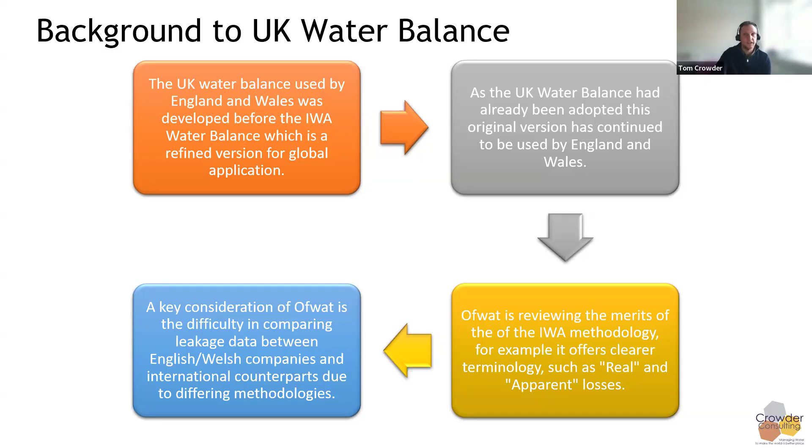So from a UK perspective, or a UK water company perspective, they might be thinking about this at the moment, and what they would be thinking about is, well, what does the IWA water balance look like?

Because they're used to doing their current UK water balance. And how does it compare with the UK water balance? And what would it mean if we had to do our reporting based on the IWA water balance? And should we be paying more attention to international comparisons of performance indicators?

At the same time, the English water companies have quite stringent or difficult targets to meet over the next 5 years. This particular water company that we're going to focus on has to reduce leakage by 16% and per capita consumption by 7%. So there's quite a lot of challenges or thoughts that the English water companies are facing.

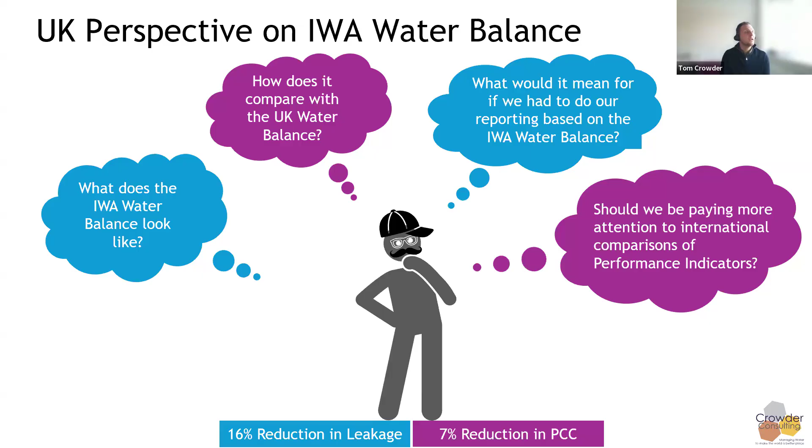Firstly, just a very quick overview of the IWA water balance, and we'll explore this a lot more during today's session. It's a structured framework to account for all water entering and leaving a distribution system, and it classifies water use and losses into standard components to support consistent global reporting. The IWA water balance focuses on breaking down non-revenue water into its key components, and we'll explore those today.

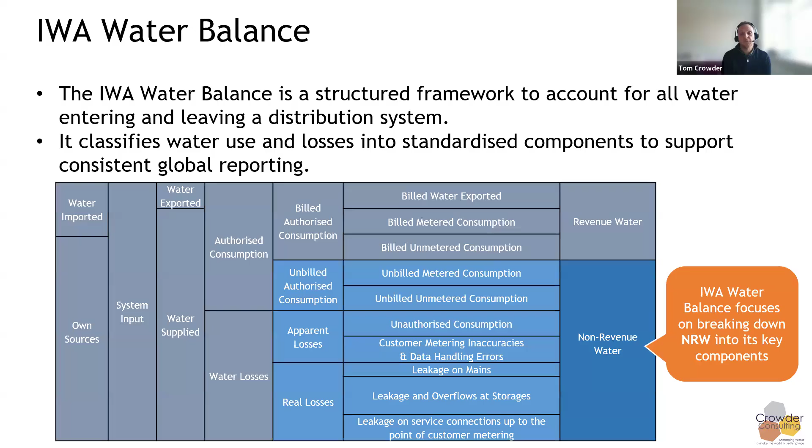Mapping the UK to the IWA water balance is fairly straightforward, because most of the components in the IWA water balance are very similar to the UK, but they just use different terminology, and so they can be mapped. That's part of what I'll show today - how they map to the IWA water balance.

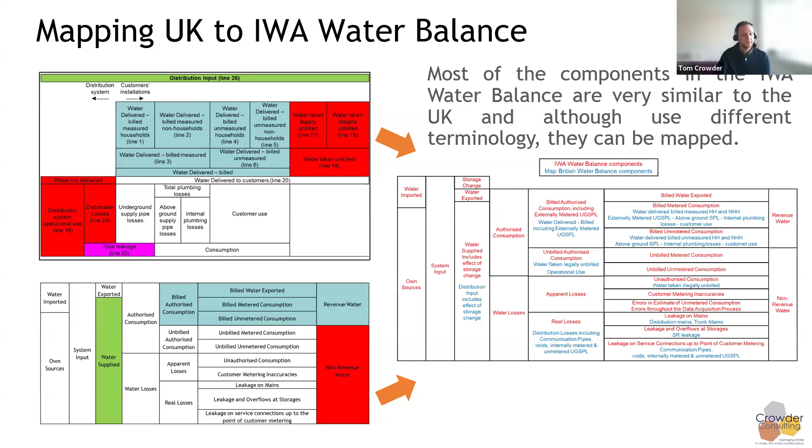So firstly, just some definitions. When we think about non-revenue water, this refers to the water that has been produced by a water utility, but it's not billed to customers. It represents the gap between the amount of water put into the distribution system and the amount billed for consumption. And it includes three main components: real losses or physical losses, apparent losses or commercial losses, and unbilled authorized consumption.

Non-revenue water is often expressed by international utilities as a percentage of water supplied, or it can be expressed as a percentage of system input if they want to make the percentage lower.

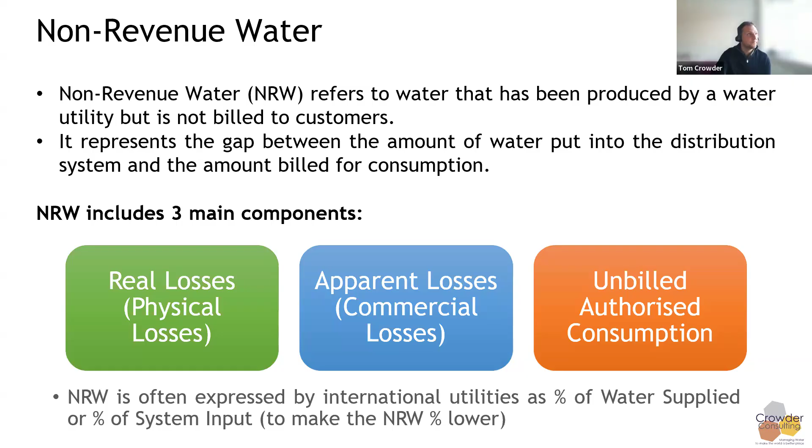Real or physical losses occur due to leaks in a distribution system, including pipes, storage tanks, and other infrastructure, and this water physically escapes the network before it reaches customers. The first really interesting fact is that if the UK or England and Wales water companies did report on real losses, its leakage would be slightly lower, because at the moment the UK includes externally metered underground supply pipe leakage - in other words, leakage that is beyond the water meter on supply pipes - in its total leakage that it reports, whereas the IWA real losses doesn't include that.

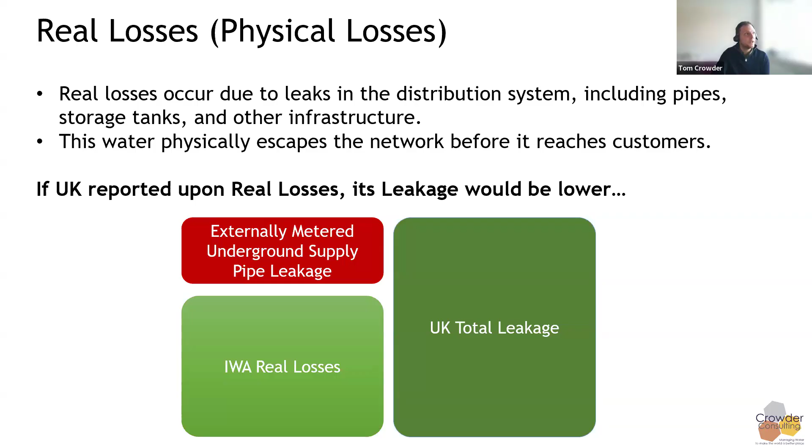Apparent losses or commercial losses occur when water is used but not properly measured, so things like meter under registration, and common causes include theft and unauthorized connections. There's a lot of emphasis internationally on replacing meters to reduce apparent losses as part of their non-revenue water programs. In the UK, these components are deducted to derive reported leakage, whereas in the IWA water balance, they are included under the non-revenue water.

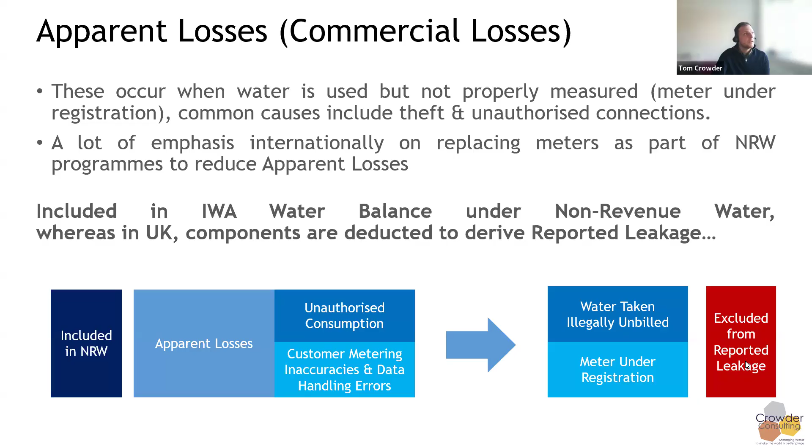Then for unbilled authorized consumption, this is water used for legitimate purposes that are not billed, such as firefighting, mains flushing, or water supplied free of charge. This would be mapped to water taken legally unbilled and operational use in the UK water balance. Similar to apparent losses, these are included in the non-revenue water, whereas in the UK, water taken legally unbilled and distribution system operational use are excluded from leakage.

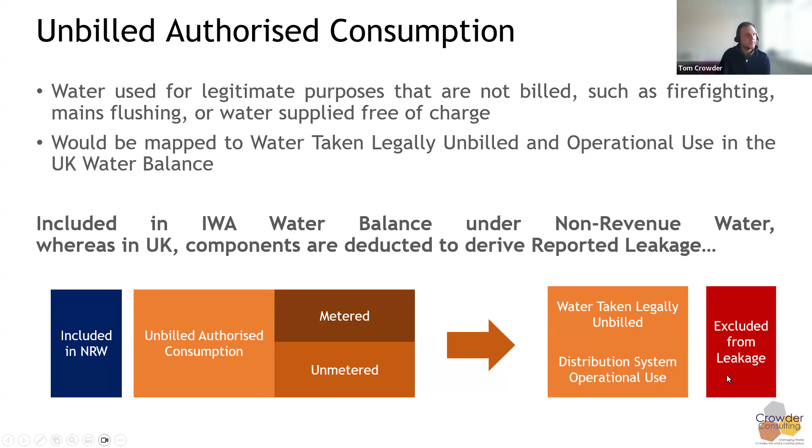So when we look at the top-down water balance for this particular UK water company, this is what it looks like. It starts with what we call distribution input, and then we deduct all of the billed consumption, we deduct the operational use, we deduct the water taken legally unbilled and illegally unbilled, and we deduct the meter under registration, and then we end up with the top-down leakage, which is what we use in the UK water balance.

And we compare this with the bottom-up leakage, which I'll go into later, and reconcile that with it. In this particular case, the bottom-up leakage was just over 335 megalitres. So there's a very small negative discrepancy, and the reported leakage was 335 megalitres after reconciling it with the bottom-up.

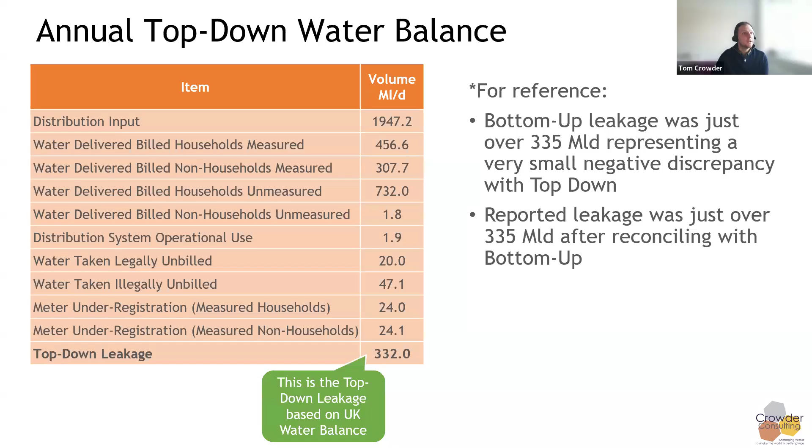If we applied the same rules for leakage or real losses as the IWA water balance, then we wouldn't add on the externally metered underground supply pipe losses. This is really just illustrating that the real losses would be slightly lower because we wouldn't be adding on this amount to the leakage. So it's just showing that discrepancy between real losses and the leakage that we report in the UK.

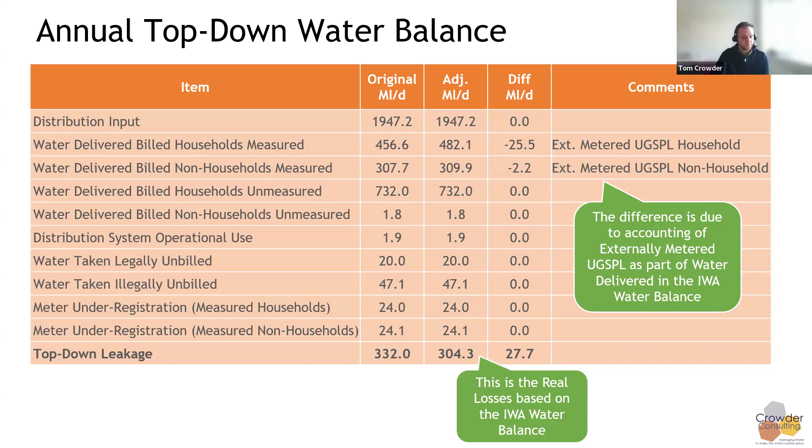The first thing to focus on is the non-revenue water calculation. Here in the UK, we don't focus that much on non-revenue water as a number that we report, but internationally it's a very important part of the water balance. If this water company were to move to the IWA approach and report based on non-revenue water, the figure would be over 86 megalitres higher, or 26% higher, than the number they're currently reporting, which is the leakage.

These tables show how non-revenue water would be calculated for this English water company. On the left we've got the English or UK terminology, and on the right the IWA terminology. We can see this calculation of non-revenue water, which is the water supplied take away the billed authorized consumption, giving us our non-revenue water. In this particular case, it would be around 22% of the water supplied.

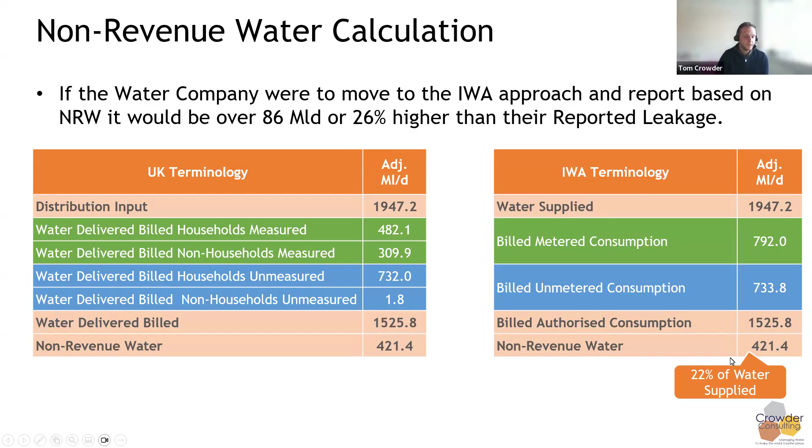Then if we calculate the real and apparent losses, if this water company were to move to the IWA approach and report based on real losses, it would be 27.7 megalitres lower, or 8.3% lower, than the leakage they're currently reporting.

Again, what we've got here is the UK terminology in terms of the water balance and what they call each component, and then the international IWA terminology. We can see how we start with non-revenue water, take away unbilled authorized consumption to get water losses, then take away unauthorized consumption and customer metering inaccuracies, which is our apparent losses, leaving us with the real losses. So it's showing how the two water balances, although they use different terminology, do line up quite well with each other.

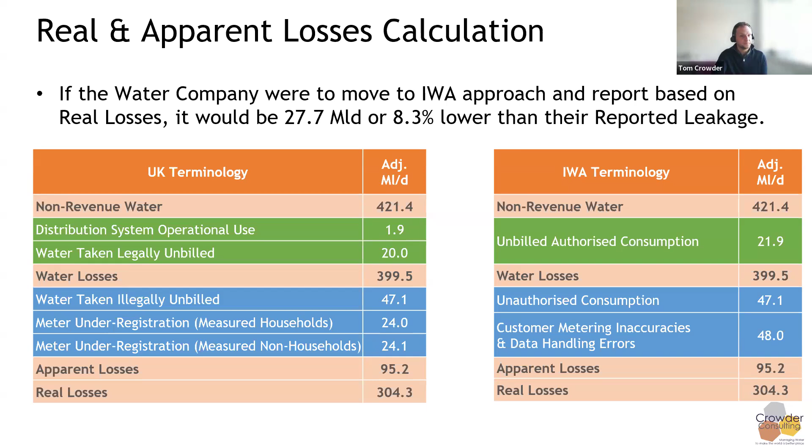For this particular water company, the non-revenue water would be 421 megalitres, or 22% of water supplied. That's broken down into real losses, around 304 megalitres or 72%, apparent losses, which is 95 megalitres or 23%, and unbilled authorized consumption, 22 megalitres or 5%. Its ILI would be 1.5, and its CRLI would be 25 based on these real losses.

These are some of the performance indicators that we'll go into more detail on later. It's also worth noting that it was quite straightforward, based on the water balance information this English company has to provide, to split the real losses into its three components.

We can see how much there is in terms of leakage on mains, leakage and overflows at storages, and then leakage on service connections. So you can see the main bit of leakage is the leakage on the mains, and then we have leakage on service connections and only a small amount of leakage and overflows at storage sites.

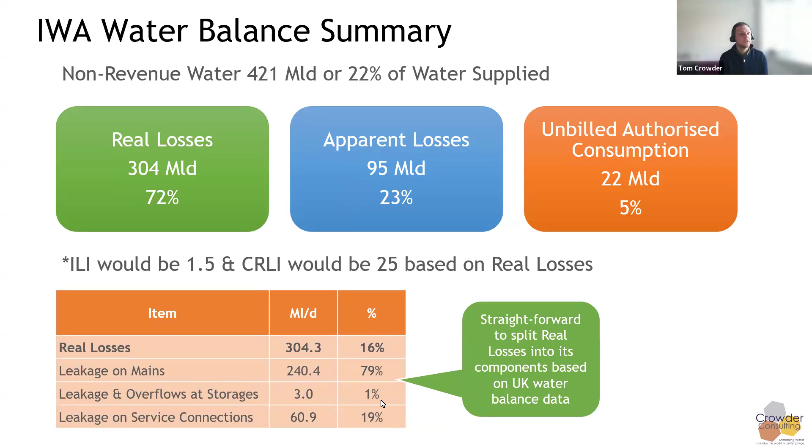So just to do a quick critique of the water balance methods, if we compare the IWA water balance with the UK water balance: the IWA water balance is developed for global standardization, whereas the UK is developed for the UK specific context.

In terms of structure, the IWA water balance has a clear distinction between apparent and real losses, whereas the UK water balance has less emphasis on this split. In terms of terminology, the IWA water balance is globally recognized and consistently defined, whereas the UK water balance uses some UK-specific terms.

The IWA water balance is designed to be adaptable for various countries, whereas the UK is less adaptable because it's UK-specific. In terms of best practice, the IWA water balance promotes consistent benchmarking globally, whereas the UK water balance is focused on national and regional comparisons, so we can compare water companies in England and Wales quite well, but it's harder to compare them internationally.

The IWA water balance focuses a lot on non-revenue water. There's less focus on customer side leakage, whereas in the UK we focus on leakage and there's more focus on customer side leakage.

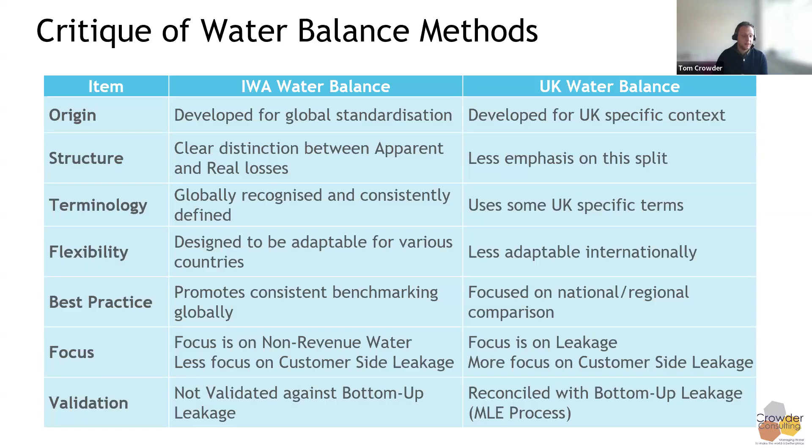We did a little vote in one of our user conferences with our clients, and it was fairly evenly split about whether the UK should adopt the IWA water balance to align with international best practice. I think part of it is understanding the IWA water balance better, from the England and Wales water companies. Once they understand it better and become more confident in it, maybe they would want to adopt it. So just some food for thought before we move on to the next section.

The IWA water balance makes international comparisons easier, but does it focus enough on real losses? Based on my experience, a lot of focus is on non-revenue water, and working in the UK, a lot of the focus is on leakage, which is really real losses. So you could say, does the UK focus enough on non-revenue water? Does the international water balance focus enough on real losses?

The IWA water balance does no validation with bottom-up leakage. Is there a consequence to this? A lot of international water utilities have DMAs and are utilizing them. If they are more advanced, should they then validate their leakage, their water balance with the results from their DMAs? And UK water companies are accountable for customer side leakage, and that's a good thing, isn't it? Or maybe it's not. Maybe we should be less accountable for customer side leakage, and that should be the customer's problem. So just some food for thought.

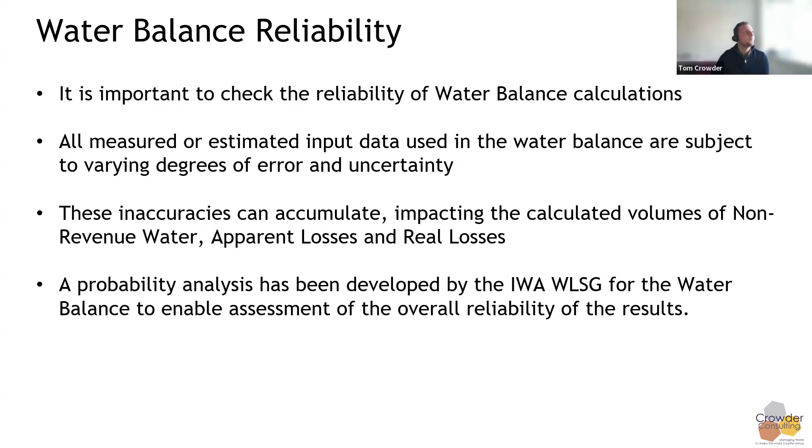It uses 95% confidence limits, and the use of 95% confidence limits simply means that calculations based on approximate data will have wider confidence intervals than those derived from more reliable data. It's based on this bell-shaped curve, which represents a normal statistical distribution.

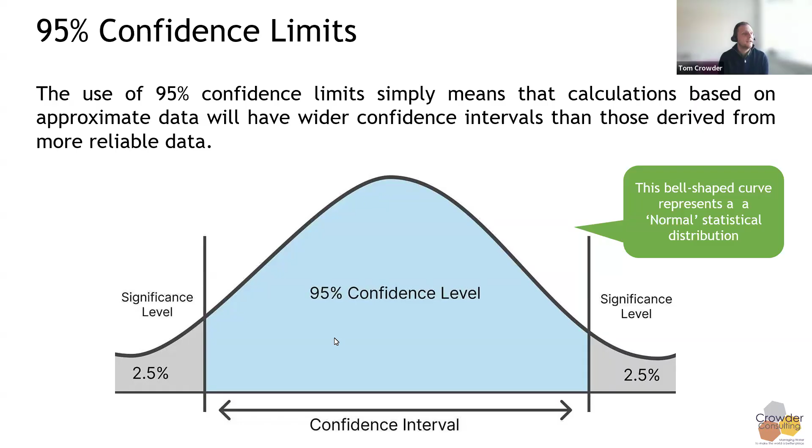We're going to look at how we apply those 95% confidence limits to the IWA water balance for this English water company. So in the water balance, confidence limits are entered as a percentage uncertainty range, which means I am 95% confident that the value I have inputted is within X% of the true value.

So we can see for our water balance for this English water company, these are the actual confidence limits that they have applied in their water balance calculation. It's important to say that both the UK and the IWA apply confidence limits to the water balance. These confidence limits should be applied to all of the data inputs.

So it's applied to all these values in blue. Once the blue values have been entered, the water balance can then automatically calculate the 95% confidence limit for the derived values. I'll show you how it does that.

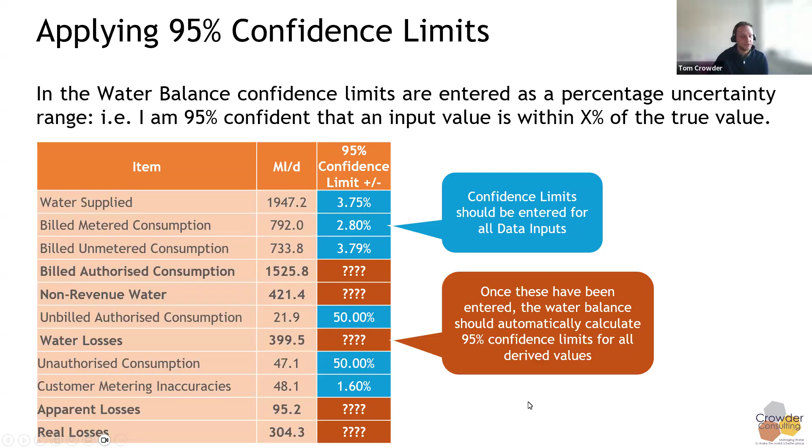The first thing it does is to calculate the standard deviation and the variance for each of the data inputs in the water balance based on the 95% confidence limits applied. You can see here that the standard deviation is the volume multiplied by the confidence limit and divided by 1.96. The 1.96 is to take into account the 95% confidence limit that we're applying. So it's basically 1947.2 times 3.75% divided by 1.96, and that equals 37.26, that standard deviation there.

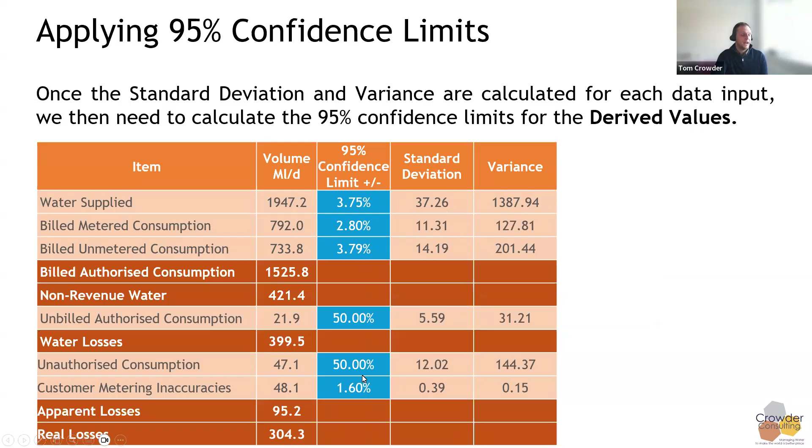The next thing we do is work out the variance, which is the standard deviation squared. So we take that 37.26, we square it, and we get 1387.94. We can do that for all of the data inputs where we've entered confidence limits. The next step is to work out what the confidence limits are for the derived values. To do this, for the variance, we simply sum it up for our components. So for billed authorized consumption, we sum up these two items and we get the variance.

The standard deviation is then the square root of the variance. So we're getting the square root of that to get 18.15. And then the 95% confidence limit is the standard deviation divided by the volume times 1.96. So in other words, we're back calculating now what this 95% confidence limit is, and we get 2.33%.

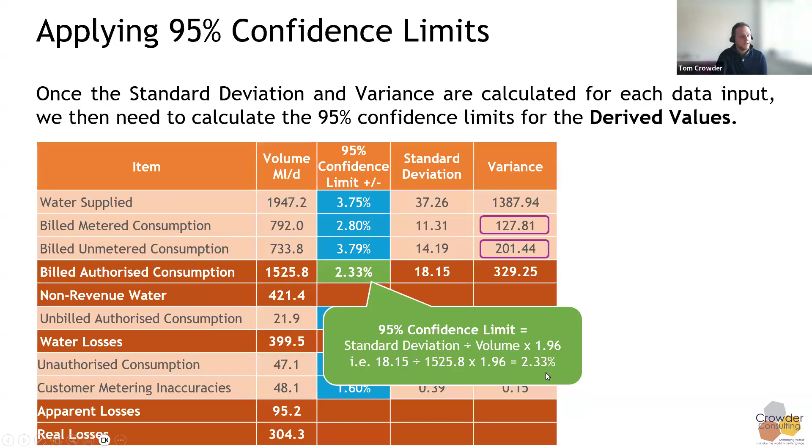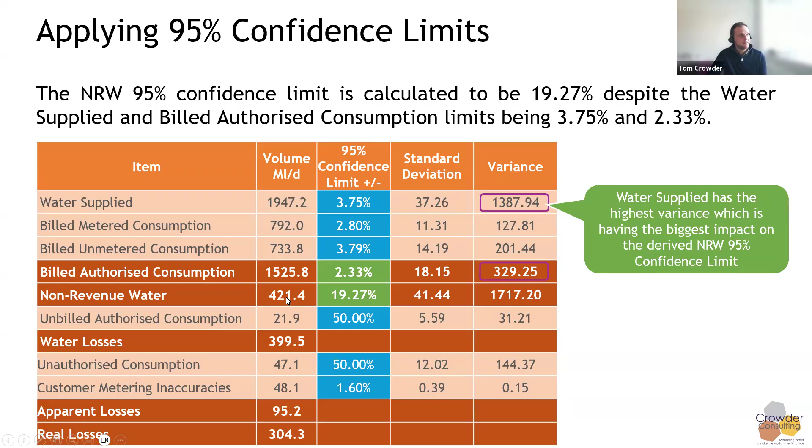So then we can apply that to our calculations, and we can see that the 95% confidence limit for non-revenue water has been calculated as 19.27%. This is despite the water supplied and billed authorized consumption limits being only 3.75% and 2.33%. The reason is that water supplied has the highest variance, and this is having a big impact on the confidence limit for non-revenue water. In other words, this variance is a bigger proportion of this number here, so that's why this percentage is higher.

We can then see the 95% confidence limits for water losses, and this is slightly worse than non-revenue water because of the low confidence in unbilled authorized consumption here. We can see the 95% confidence limits for apparent losses, which is nearly 25%, plus or minus 25%, and that's because of the low confidence in the unauthorized consumption, 50% here.

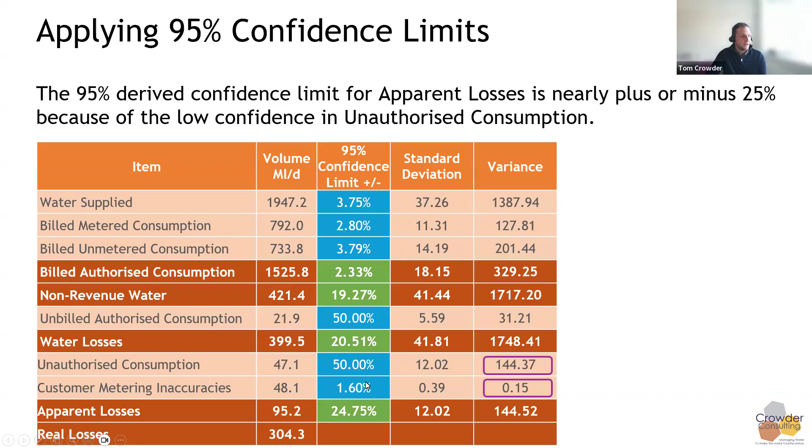And then finally, we can see what our 95% confidence limit would be for real losses, so plus or minus 28%. And it's really getting influenced a lot by the water supplied. So it's just like non-revenue water - this water supplied is having a big impact on the real losses.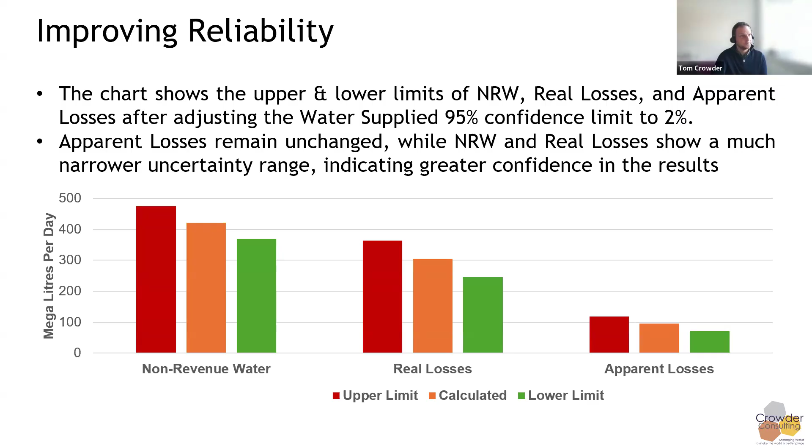So just to put this into practice with a small case study - this is about a ring main that goes around a well-known city in the UK. It's got 80 kilometres of tunnels transporting water from 5 water treatment works throughout the city. It has 25 shafts made up of input, output, and inspection shafts, and the sections are shut down and maintained once every 10 years. It's very difficult to access, with 13 inlet meters and 44 outlet meters.

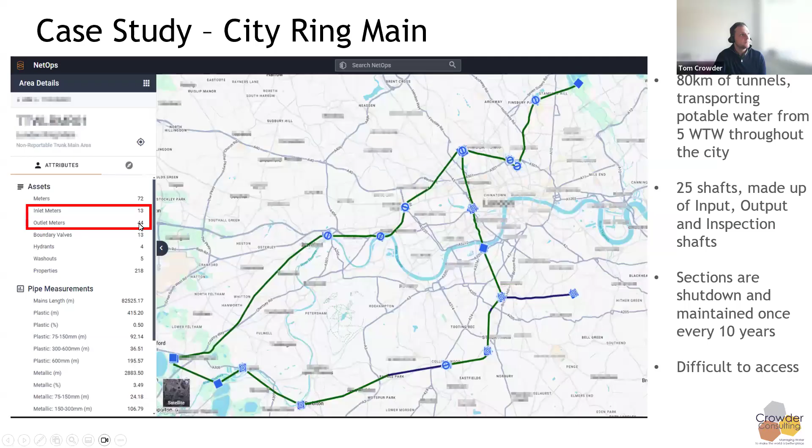The issue in this ring main was that when they measured the input versus the output, there was a discrepancy of 55.9 megalitres per day. So it's a large discrepancy, based on the flow balances. We focused investigations on 3 key areas: operational use in the 25 shafts, doing flow balances between shafts, and verification of the input-output meters.

And this is just a photo of what the pipe, the ring main, looks like. So it's 2.5 meters in diameter and 30 meters below ground.

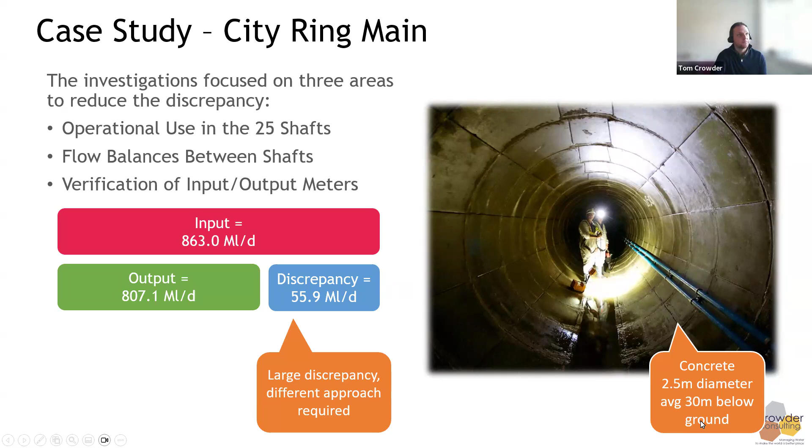So the first thing that we did was focus on the operational use, and you can see here how we installed AMR meters on the components that we're using operational use. So here, this is the thrust-bearing cooling water for the pumps, and this obviously takes water and uses it. This is before, and this is after a meter was installed, so now we can measure exactly how much water is getting used for that.

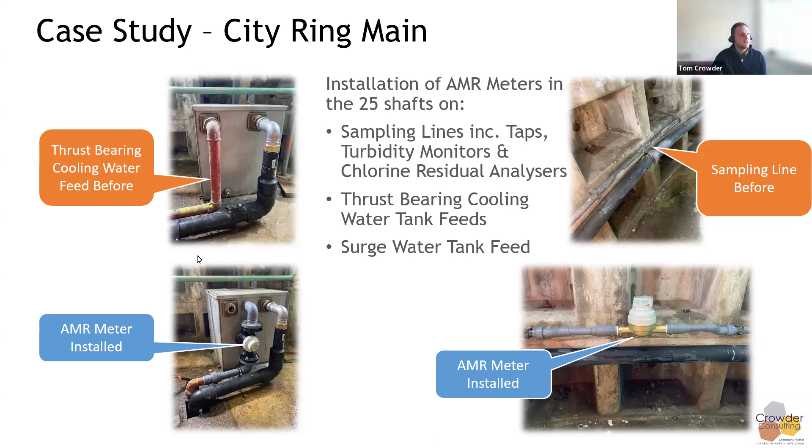This is a sampling line for turbidity checks and other water quality checks. This is a sampling line before, and this is a sampling line after, where we've put an AMR meter on there. Before installing these meters, it's really a bit of guesswork about how much operational use is actually being used, but once you've installed these meters, you know exactly how much water is being used. You can see all of these are sampling sites, and how different they are for all of the different sites - it shows how important it is to actually measure the operational use at these sites.

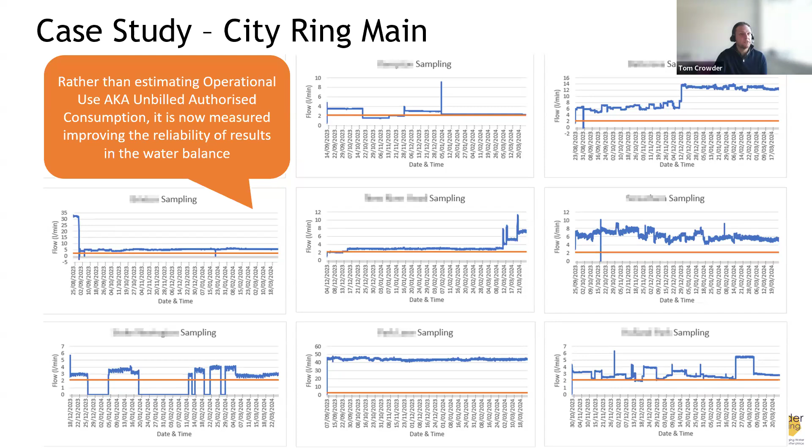Next thing that we did was to do flow balances between shafts using an ultrasonic meter to assess if there's any leakage on any section of the ring main. You can see that's inside the shaft here, and this is the pipe, and these are the meters getting strapped around the pipe to measure the flow. From this, we were able to see little or no discrepancy from this water treatment works to this shaft here, but between these two shafts we could see a 4.4 megaliter discrepancy. So we suspect there is some leakage on this section of the ring main.

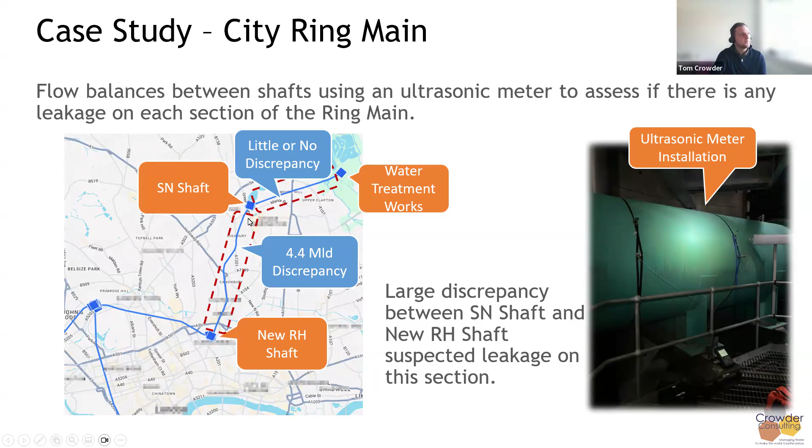The other thing we did was some meter verifications. This is an example of a situation we came across where we have a shaft that has two DI meters, or distribution input meters, coming into it. These are production meters, and then they go out of the shaft into the ring main. There was a location for a meter here, but it didn't actually have a meter installed because of flooding. This is all 30 meters below ground. This is a picture of that location where we installed the ultrasonic meter.

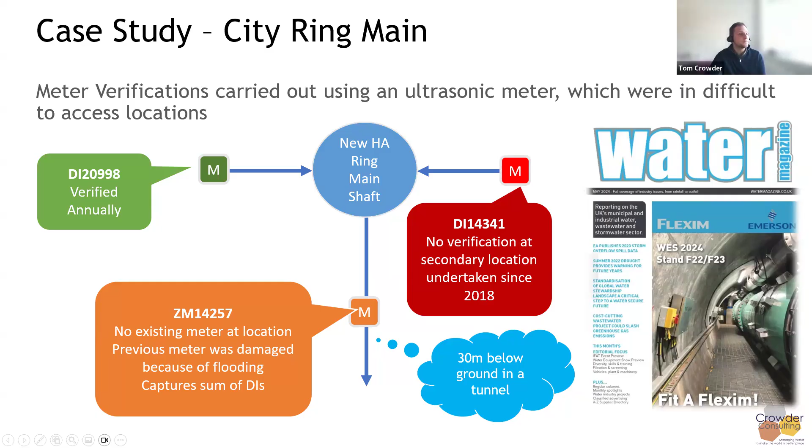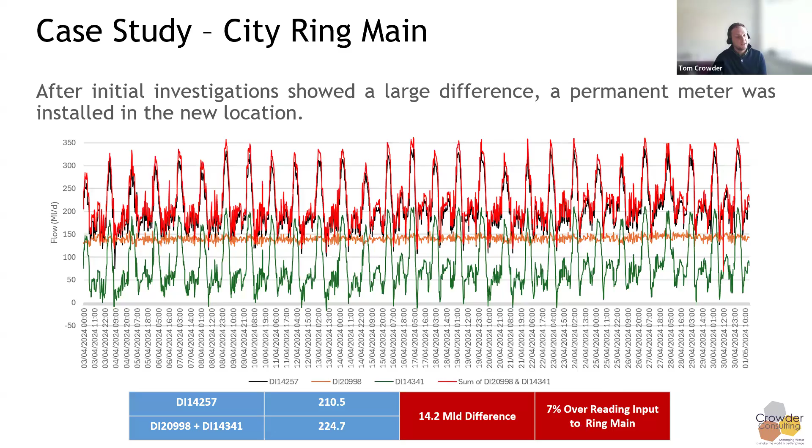This company, I think Flexim, was very pleased, so they were showcasing it in a magazine where we installed that meter. Basically, what we discovered is that there was quite a big difference between where our meter was installed and the sum of the DI meters. Just to go back, this DI meter was verified annually, whereas this DI meter couldn't be verified because of its location. So we discovered a big discrepancy, 14.2 megaliters difference, and it was overreading, with too much water being registered as coming into the ring main than what actually was.

We also verified several output meters and found that they were under-reading. Combined with everything else, this accounted for 47% of the total discrepancy. Remember, we had a 55.9 megaliter discrepancy. We accounted for some of it with operational use, some was leakage, but a big chunk was, in fact, metering inaccuracies. There's still a large portion that is unknown, and it's still getting investigated. So this really just illustrates what uncertainty means in practice - it means you can be over or underestimating your losses on a network.

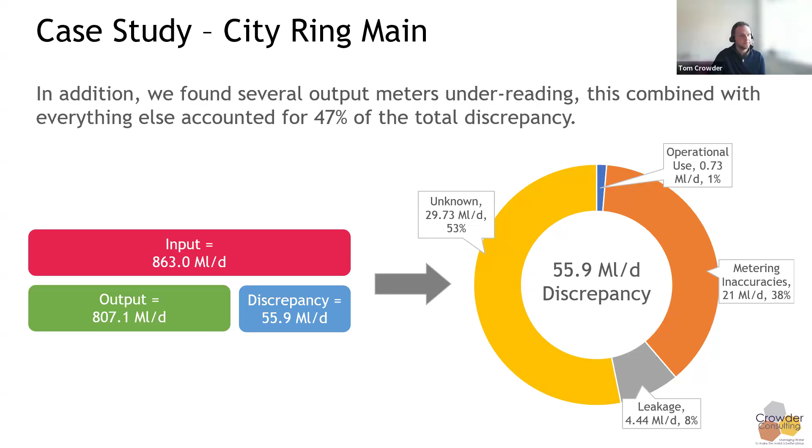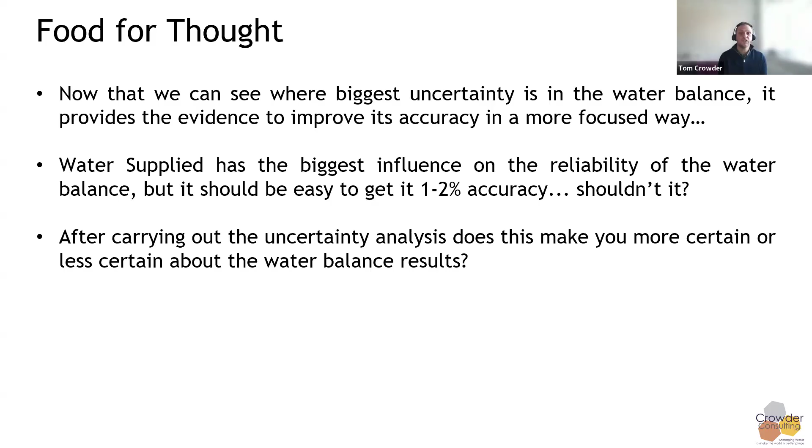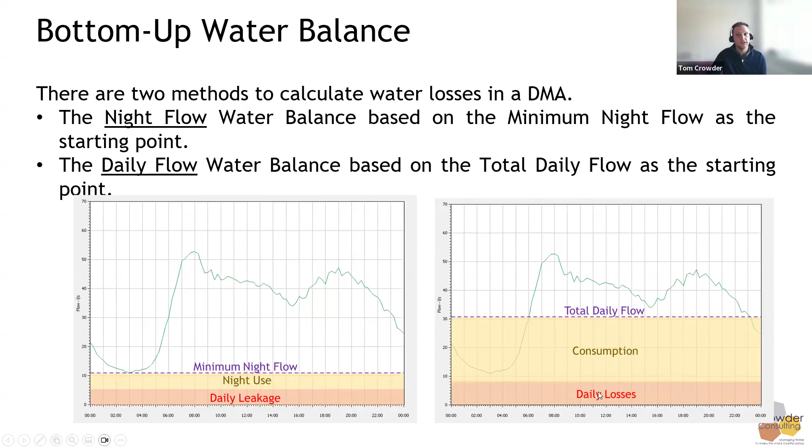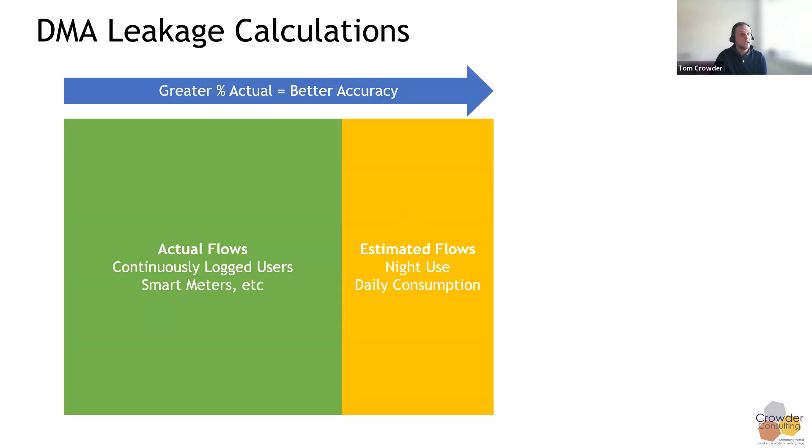When we think about the DMA leakage calculations, within a DMA itself we have some actual flows, like continuously logged users and smart meters, where we know what they are actually using day or night. We also have estimated flows, estimating night use and estimating daily consumption. As a rule, the greater the percent that is actual, the more accuracy in your results, and the greater the percent that is measured, the higher the confidence in your results. But this depends on having a good night use model and good meter reading frequency for your measured consumption.

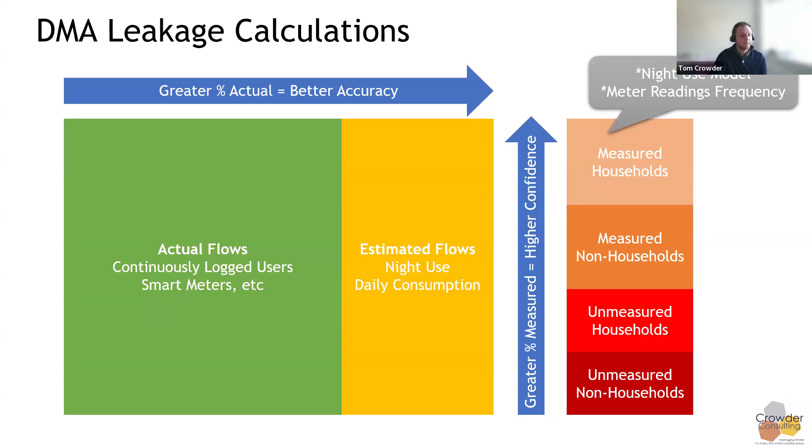When we think about the night flow water balance, it starts with the minimum night flow. We deduct the things we actually know, the continuously logged night flow and the smart metered night flow. Then we deduct the estimated night use for households, non-households, and any miscellaneous use. What we're left with is the night flow leakage. We then multiply that by a night day factor, which gives us our daily leakage.

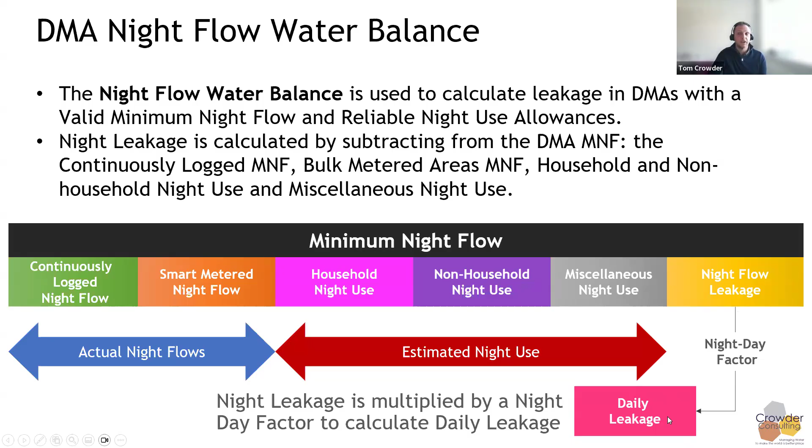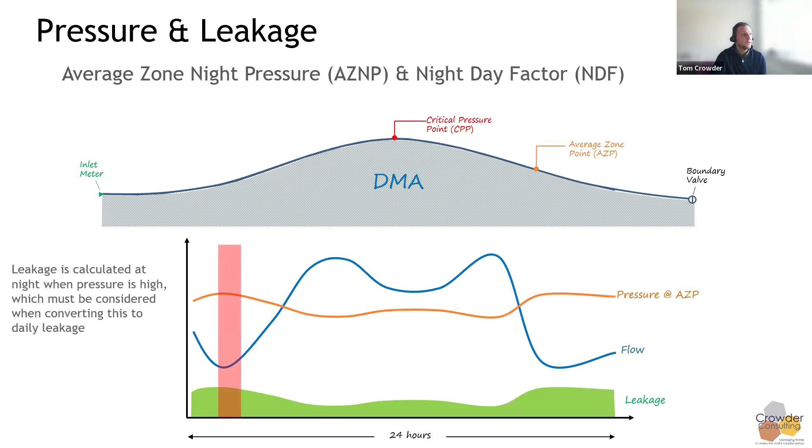Leakage is calculated at night when pressure is high, which must be considered when converting this to daily leakage. If we just multiply leakage by 24 hours, we'd be assuming it's constant throughout the day. So we work out the night day factor, using the ratio between the night pressure and the average daily pressure to adjust the leakage. We take the average zone night pressure at the same time as the minimum night flow, then the average pressure, and it's the ratio between those two that allows us to adjust our leakage.

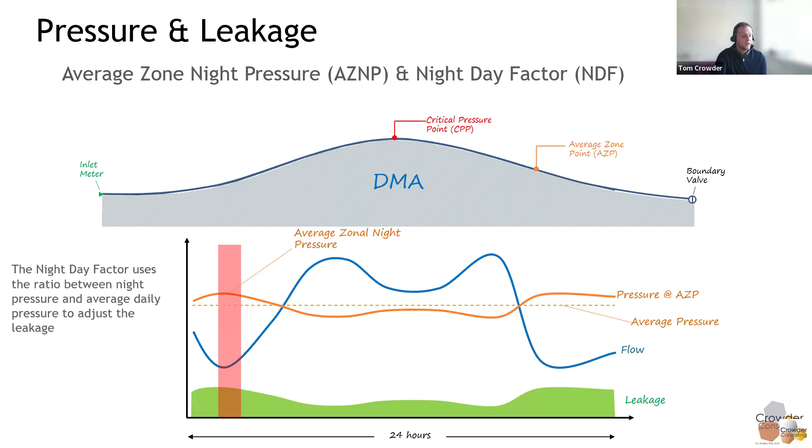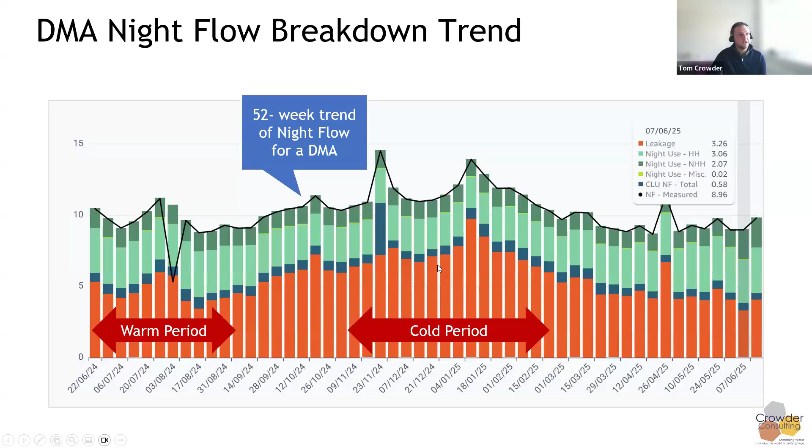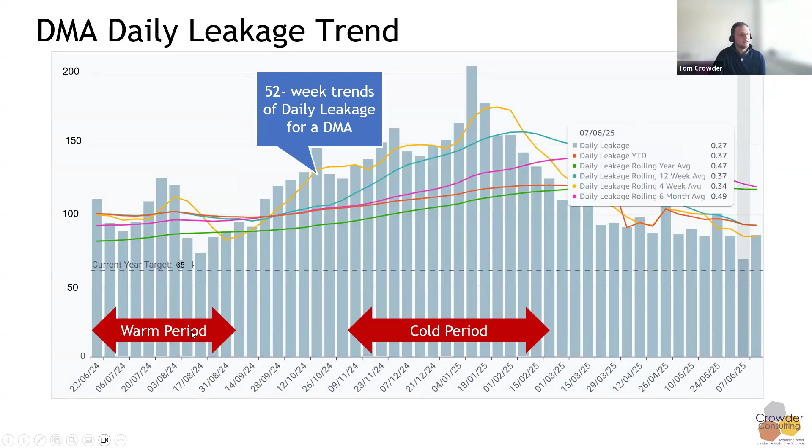Once we've calculated leakage for a DMA, you can see the minimum night flow along the top, and all of the components we're deducting. What we're left with at the end is the leakage. You can see how leakage varies, especially in the UK, throughout the year, during warm periods and cold periods where it increases. This same graph shows the daily leakage trend, and again we can see how that varies throughout the year between the warm period and the cold period.

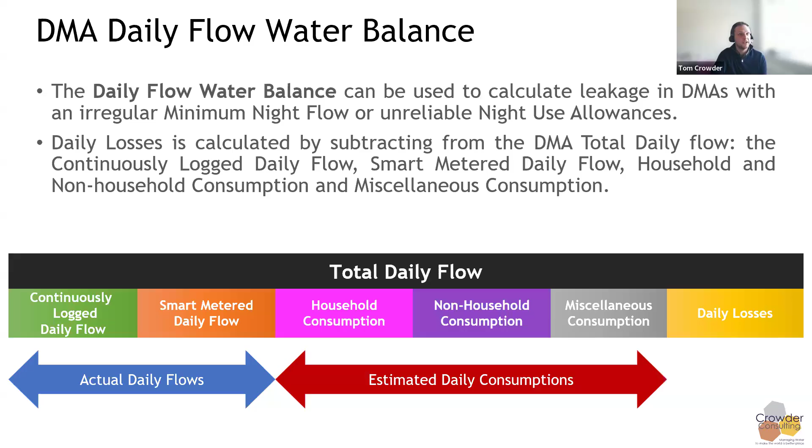The daily flow water balance for a DMA is the same calculation, but using the total daily flow as a starting point. We still deduct our actual flows from continuous logging and smart meters, then our estimated consumptions, and come up with our daily losses. As good practice, it's good to compare the results from those two water balances for your DMA, because the closer they are to each other, the better.

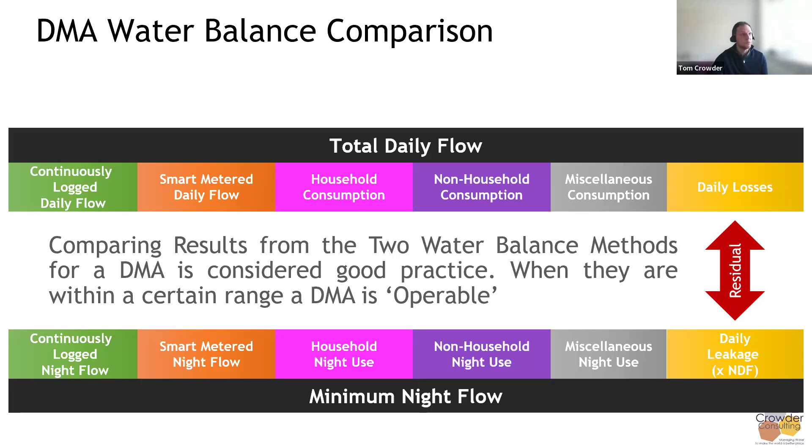That's what we use in the UK to measure whether a DMA is operable, if you're getting close results between those two water balances for a DMA. So that's just a very quick summary of the bottom-up water balance you're doing for each individual DMA, then aggregating up to get a total amount of leakage based on your DMAs for your water company.

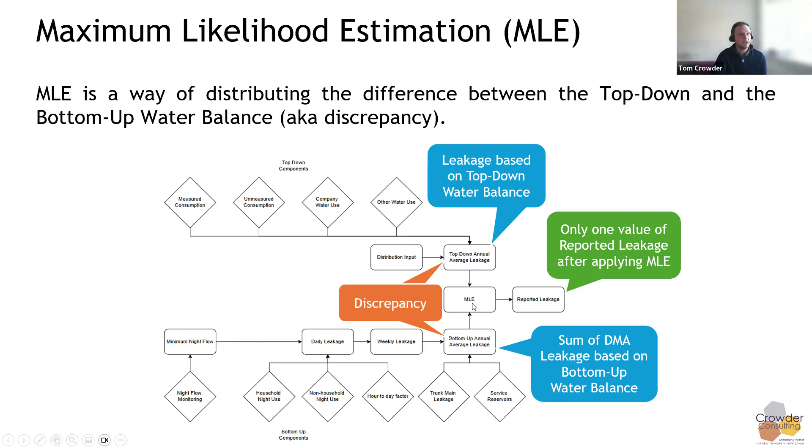And then what we do in the UK is apply maximum likelihood estimation, which is a way of distributing the difference between the top-down water balance and the bottom-up water balance. So basically, the difference between when we do the IWA water balance and when we add up all of the DMAs, what do we get? We call the difference the discrepancy. We've got the top down, the bottom up, and we can only report one value of leakage in the UK. To do that, we apply MLE, maximum likelihood estimation. So the size of the discrepancy is important.

And in the UK, the discrepancy in proportion to water supplied must be plus or minus 5% to apply MLE.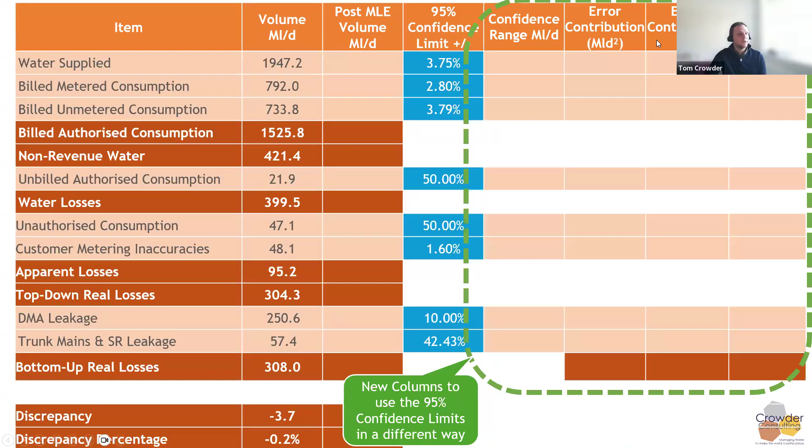We've also got some new columns to the right because we're going to use the confidence limits in a different way. The first thing we do is work out our confidence range, which is this volume multiplied by the confidence limit, giving us 73.02. Then we work out our error contribution, which is this confidence range squared, giving us this big number. And then we work out our error contribution percentage.

To do that, we sum up all of the error contributions, and then we divide each error contribution by that total to say which component is having the most impact on my discrepancy, as an error. We can see that the water supplied component is having the biggest impact. When we apply all of them, it adds up to 100%, so you can see the different components and what's having the biggest impact.

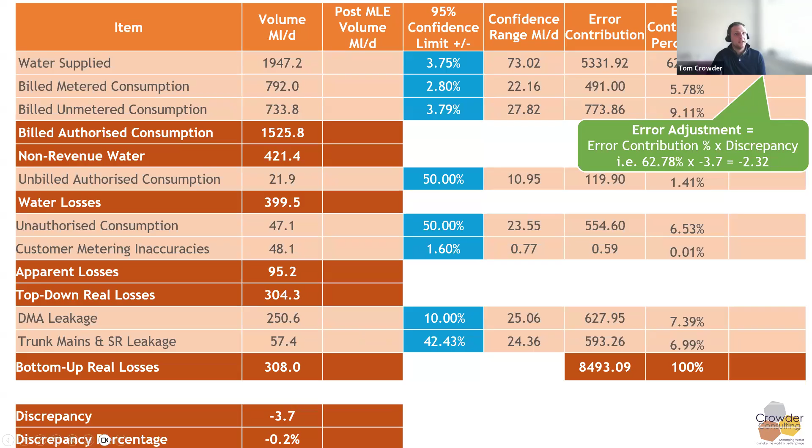We then use that percentage to adjust. We call that the error adjustment, which is basically this error contribution times the discrepancy. So we're multiplying each one by minus 3.7, giving us minus 2.32 here, and we work it all the way down, and it adds up to minus 3.7. So we've worked out that error adjustment.

And then we adjust the actual water balance itself. All of the error adjustments are added to the components, apart from water supplied, where the error adjustment is deducted from it, which is why that's got a negative. Once we apply that, we get our post-MLE values, which are revised figures after the error adjustment has been applied.

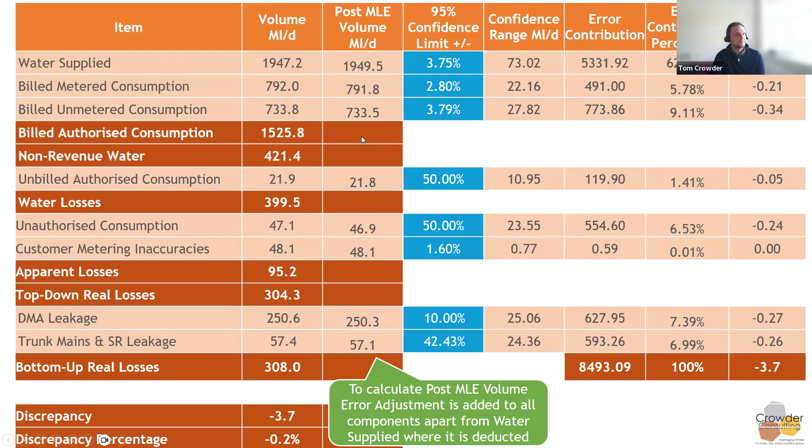We can then recalculate all of these red values based on these new values in the components. You can see that some items, such as non-revenue water, have gone up, apparent losses have gone down, and real losses has gone up. But most importantly, we can see that these two values are now the same, and the bottom-up real losses and the top-down real losses now match.

So rather than knowing the uncertainty in the water balance, the bottom-up validation with MLE enables you to apply the uncertainty to the water balance results. Once the water balance is validated with bottom-up, it can make your reported real losses and non-revenue water lower because of applying MLE.

Would this be accepted as good practice internationally? It's a question to think about, because we do this in the UK and it's accepted as good practice since we're focusing really on that one number, leakage, and trying to reconcile it to get a more accurate estimate. Whereas the international water balance focuses on non-revenue water, apparent losses, and real losses, and you could end up adjusting them all.

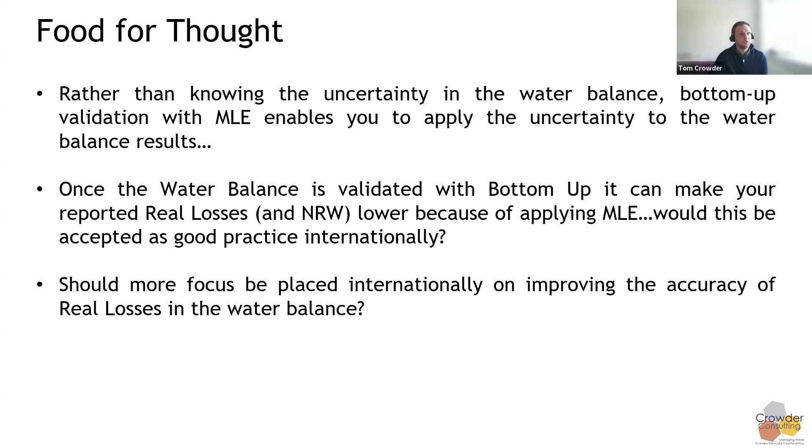So our final section is about performance indicators. The recommended form of expression for non-revenue water or real losses is a normalized value that can be easily compared with other areas, and all indicators must be measured when the system is pressurized. For non-revenue water, you're not meant to report it as a percentage of water supplied, although everyone still does, but it's not a very reliable comparison.

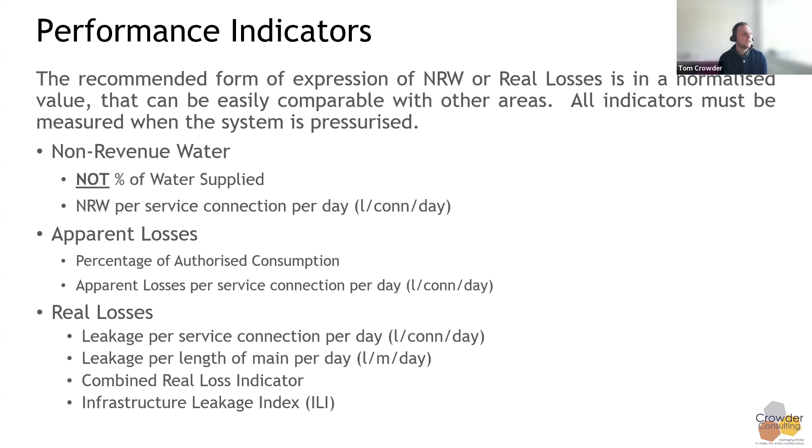Non-revenue water per service connection per day is a much better comparison for non-revenue water. For apparent losses, you could use percentage of authorized consumption or apparent losses per service connection per day. For real losses, you can use leakage per service connection per day, leakage per length of main per day, the combined real loss indicator, or the infrastructure leakage index, ILI.

These are just the results for this water company that we've been looking at. You can see the results for non-revenue water based on the top-down water balance first, and then we've got our upper limit, lower limit, and our post-MLE results. You can see how the results vary once we've applied the MLE analysis.

These are the results for apparent losses for this particular water company, again following that same approach. And these are the results for the real losses for this same water company, where we've got per connection, per meter, and then the combined real losses indicator and the ILI.

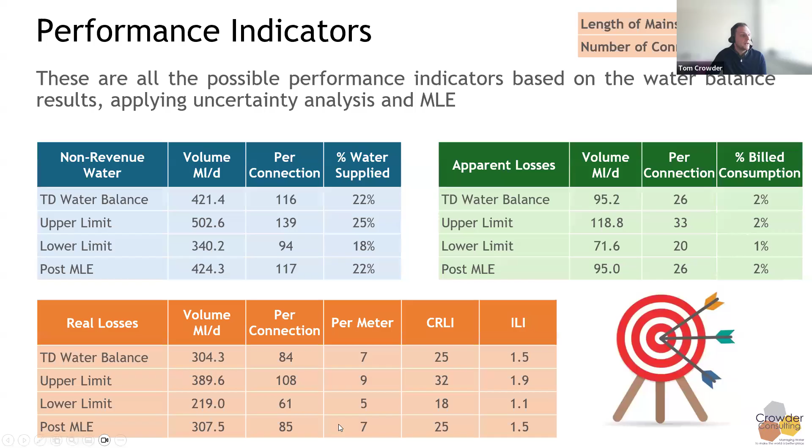This is quite interesting because we can see, based on the lower limit, how low these results could actually be if you really got more confident in your numbers, and it could in fact be that low. And then the post-MLE results. These final couple of slides are just to show what the combined real loss indicator is.

It's a leakage performance indicator being widely adopted by the IWA Water Loss Specialist Group, that measures real water losses in distribution networks. It combines leakage per connection and leakage per meter of main into a single index. In other words, we take the real losses per connection per day, multiply it by the real losses per mains length per day.

And do the square root of it. It's really trying to find the middle ground between real losses per connection and real losses per length of main.

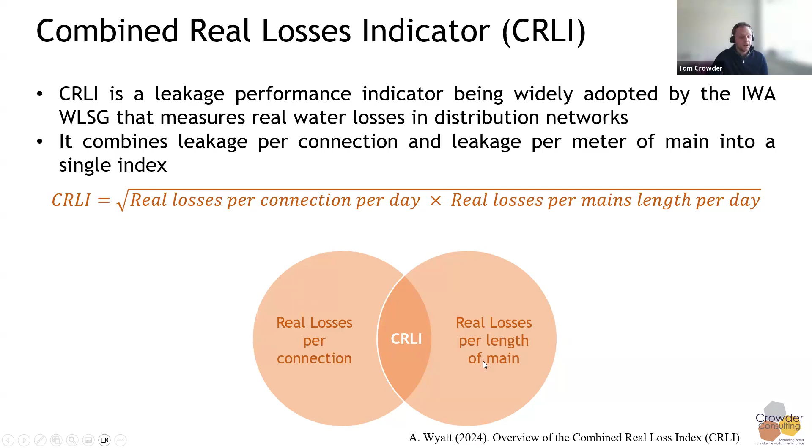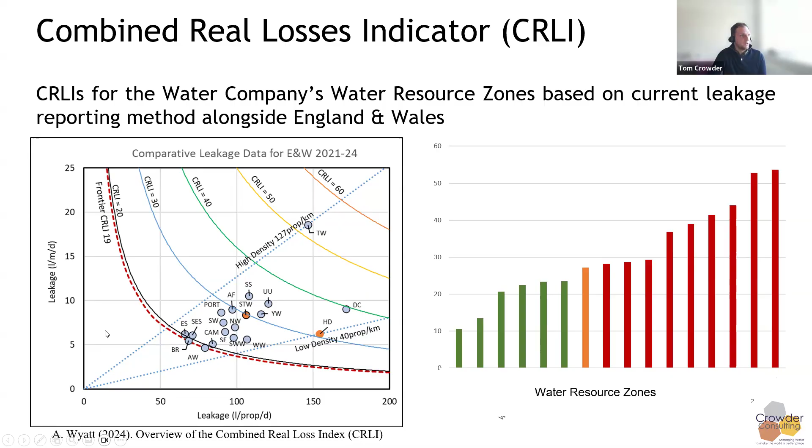For this particular water company, you can see all the individual zones that make it up, and how much they vary within the water company itself. Some of the zones are very leaky, they'd be up here, and some of the zones really aren't that leaky at all, they'd be down here.

And then the final performance indicator, ILI, which is a measure of how well a distribution network is managed, maintained, repaired, and rehabilitated as regards control of real physical losses at current operating pressure. It's the ratio of real losses to unavoidable annual real losses, or UARL.

You can see the ILIs of England and Wales compared with international companies. England and Wales ILI is around 1.7. This particular water company has an ILI of 1.6. But bear in mind that the real losses we're calculating in England and Wales are slightly higher because we include supply pipe leakage in it.

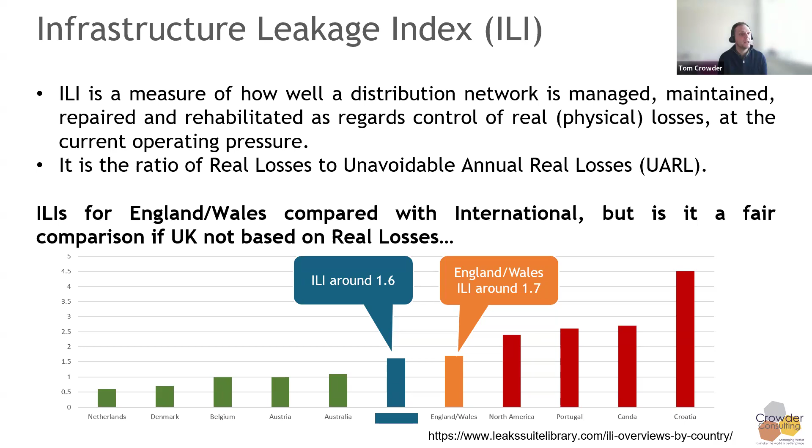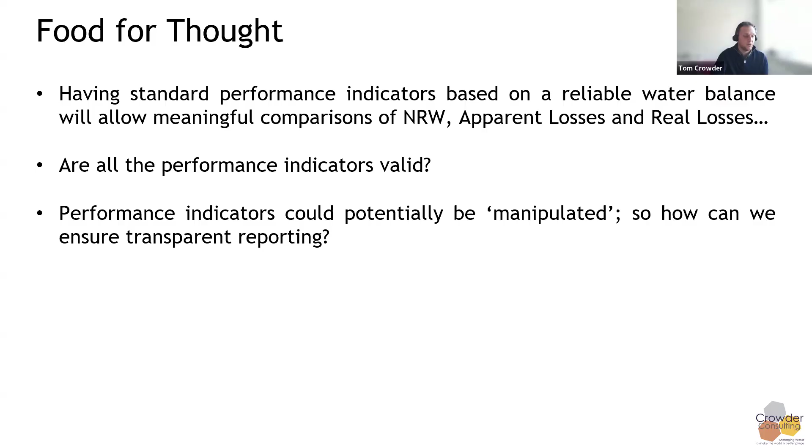So finally, just some food for thought for this section. Having standard performance indicators based on a reliable water balance will allow meaningful comparisons of non-revenue water, apparent losses, and real losses. So really, are all these performance indicators valid? There's a lot of them. Which ones should we use? And could they potentially be manipulated? So how can we ensure transparent reporting, which is what Ofwat do in their approach.

Summary: we've looked at carrying out a water balance, assessing the reliability of the water balance using confidence intervals, applying maximum likelihood estimation to reconcile top down and bottom up, and then we looked at some performance indicators for water losses. And then Michael's appeared, so that's the end.

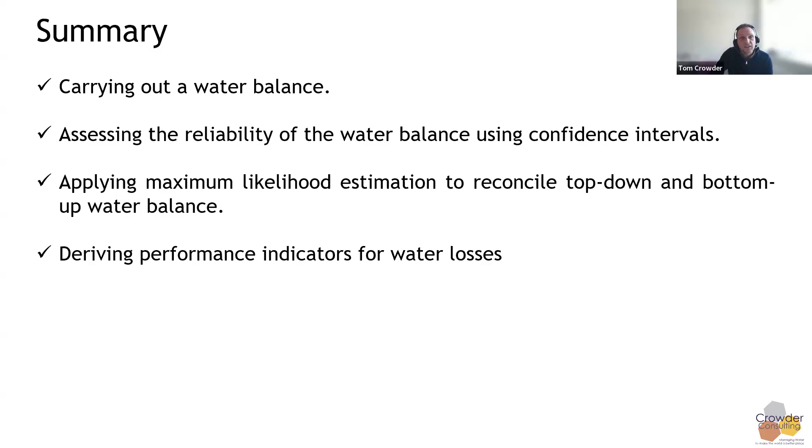So let's go to Stuart's question. Stuart said, in the UK we have properties that are metered in the highway boundary, some are metered internally, and a significant portion that are unmetered. Should we report internally and externally metered properties separately in the water balance?

It's asking me a complicated question. I think it might be better to give your view on that, Michael. I don't know, because you're more of a practitioner on it.

But yeah, short answer, I think yes, because there is that difference between externally and internally metered properties. That's my simple answer. I think it'll be a logical improvement to do them differently, because how customers react, and how we manage that, is different depending on whether they've got a meter there or not.

Stuart, you seem to be nodding, so do you want to answer your own question? Have I unmuted myself? You have unmuted yourself. Oh, okay, that's why I asked the question.

I think they should be treated differently, because obviously externally metered includes the leakage on the supply pipe, and internally metered doesn't include the leakage on the supply pipe. And I think, from Tom's excellent presentation, you made reference to the meter accuracy and so on. I think you've got two different types of meter with different accuracy levels. Okay, yeah, I think that would be a good movement forward.